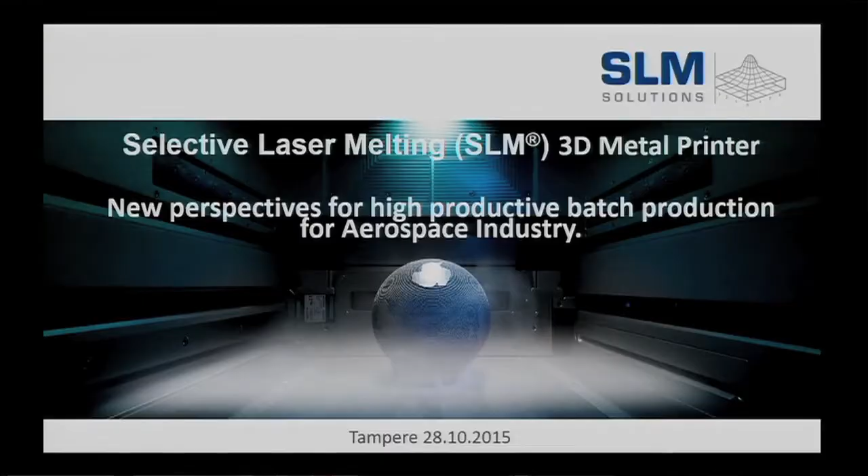So I will continue in English. Pekka, thank you very much for the introduction and for the opportunity to give a short presentation of SLM Solutions today. Actually, it's a pleasure. I think I was already here several times in Finland since I've been working for SLM Solutions, starting at the beginning of 2014. I started my business here for Northern Europe with SLM.

I would like to introduce the company, but I'd like to focus more on a case study for the aerospace or aircraft industry. So today we talk about a new perspective for high productive batch production. That means we are already one step ahead of prototyping, and we are really at the inflection point of serial production.

You already gave some information about me, so I'll just continue.

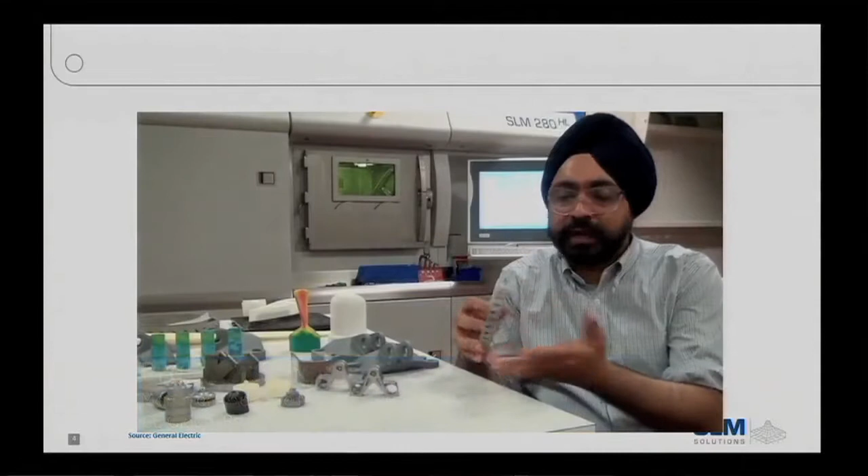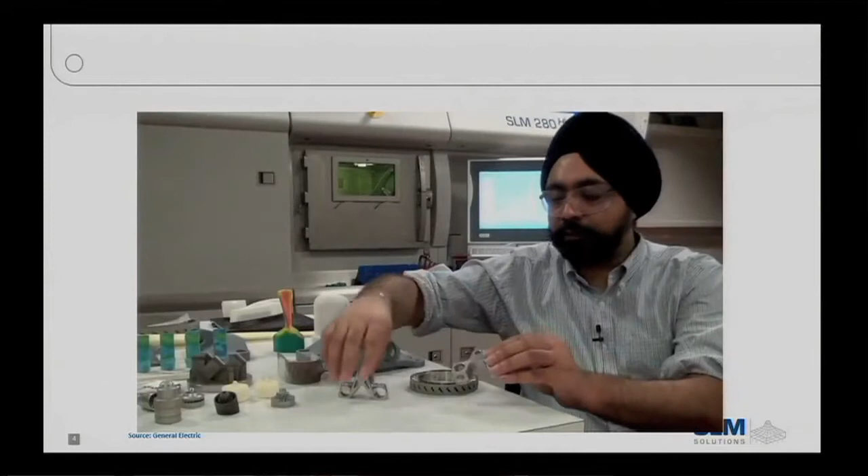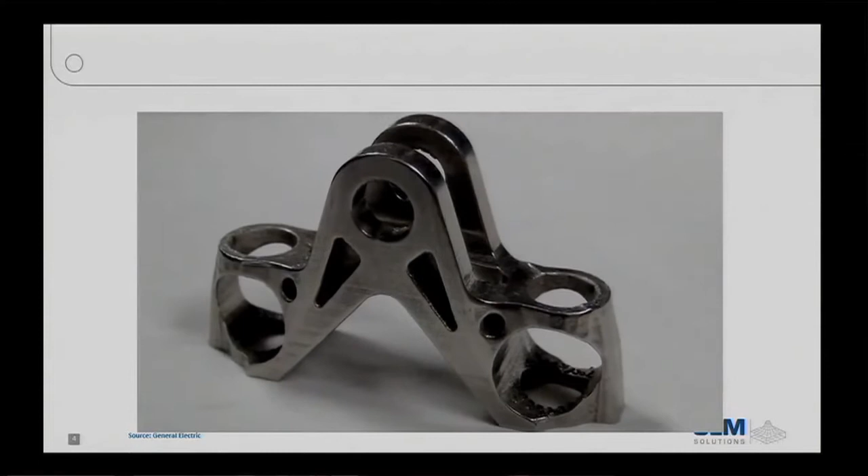The process of making a part, one layer at a time, instead of machining away material - it's a radically new way of making things. You can almost change the design on a whim. How does additive manufacturing change the way products are made? Take a look at the example of this bracket right here. This is how you make it conventionally, with very little geometric complexity. But with additive manufacturing, complexity comes for free. Therefore, I can make a part that is functionally equivalent but a lot lighter.

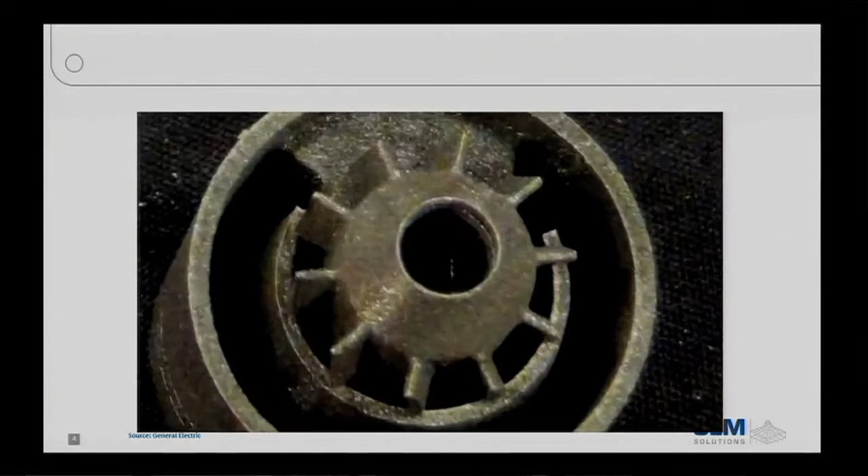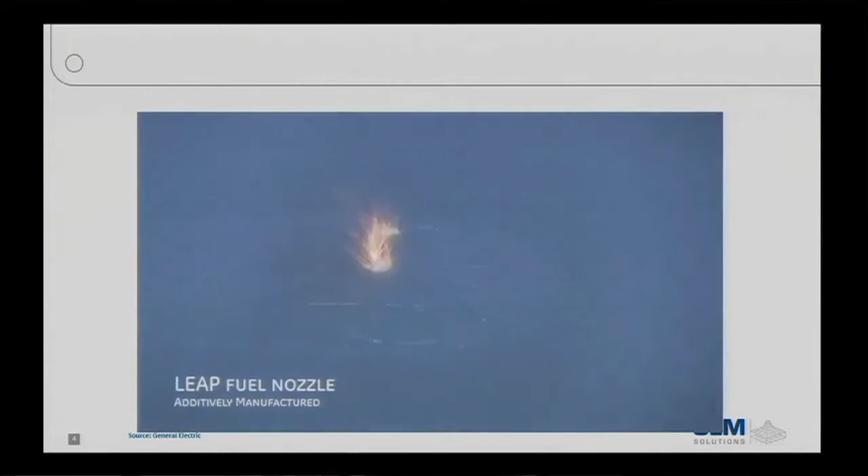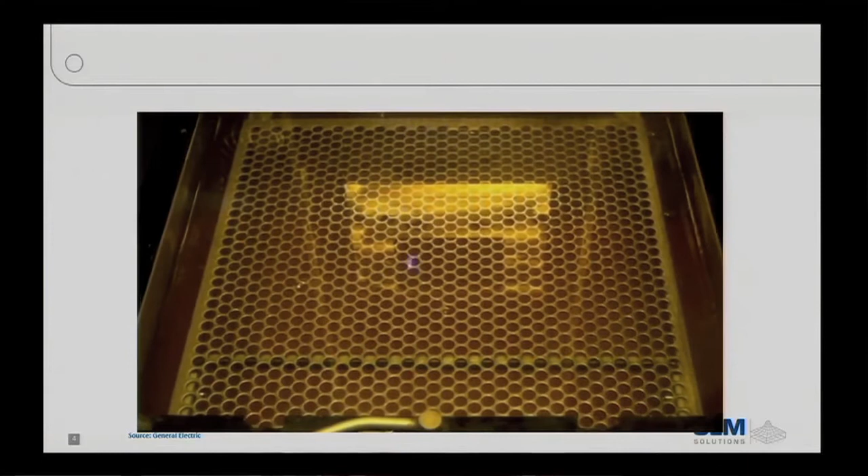Additive is just a great game changer for GE. We can iterate a lot faster, get designs through testing a lot faster, and make shapes and designs that were just not possible before. Over the last 10 years, GE has made tremendous strides in additive manufacturing, and we are now taking it into production - we'll be in production in the next year and a half to two years, in anticipation of the launch of the CFM LEAP engine. The technology is here, we've shown that it's viable, we've taken it out of the lab, it's almost ready for industrial use. We just need the infrastructure to come together so we can take it to the next step. This truly is the future of manufacturing, we believe. It's going to find a really unique niche in manufacturing technologies. It's not going to displace conventional manufacturing, but it's really going to be a game changer when it comes to making complex shapes with high performance, which is so critical to GE.

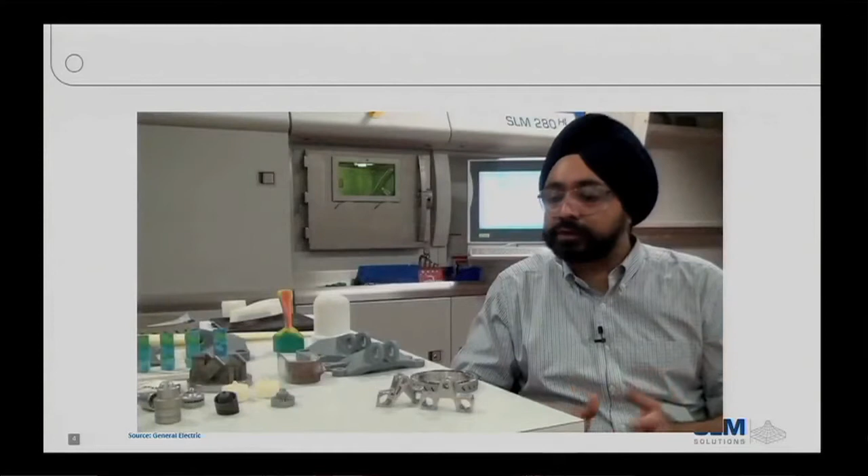Okay, this was the lucky punch, hopefully to wake you up this morning, because I recognize that you have very nice, comfortable chairs here in the university. This is not usually in Germany. Usually you have wooden chairs because people are afraid the students can fall asleep.

So hopefully now you are fully awake for listening to my explanations. I just want to give you a brief introduction, and I would like to start with a short agenda, so what you can expect this morning from me.

On the one hand, of course, a short introduction of SLM Solutions Group. Then I will show you a little bit about the initial situation of part production. And then I will show you the idea of high batch repair by means of SLM Solutions, and at least how we think to increase manufacturing productivity. This is not only a vision, it's already available.

SLM Solutions is manufacturer for selective laser melting systems, and we are located in Germany, very far in the north, very close to the East Sea. The city we are located in is Lübeck. So usually we work where other people spend their vacations.

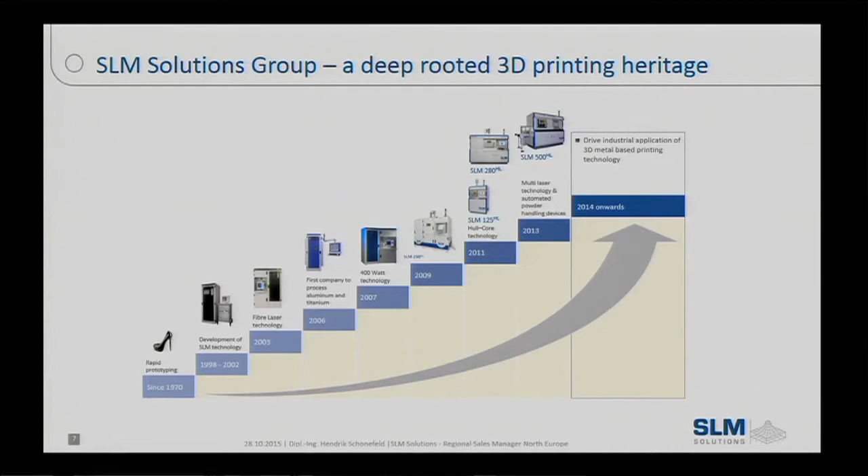We have a long-term history in rapid prototyping. I don't want to bore you with a long history of different joint ventures, and sometimes we changed our company name. But we started already with rapid prototyping, that means vacuum casting, metal casting, in the 70s. And at the early stages of this technology, when it was invented, we already started in the late 90s, early 2000s, with developing and selling selective laser melting systems.

At that stage, more or less, to universities. The technology was really not mature for the industry. You had very porous parts. But over the years, we developed and made very good improvement, so that our goal for the future was to have one day machines which have an industrial standard for industrial serial production.

And we reached that goal in 2013 with our SLM 500, working with 4 times 400 watt multiple laser systems to increase productivity and increase the build speed 4 times in comparison to the, at this stage, in the market available machine systems.

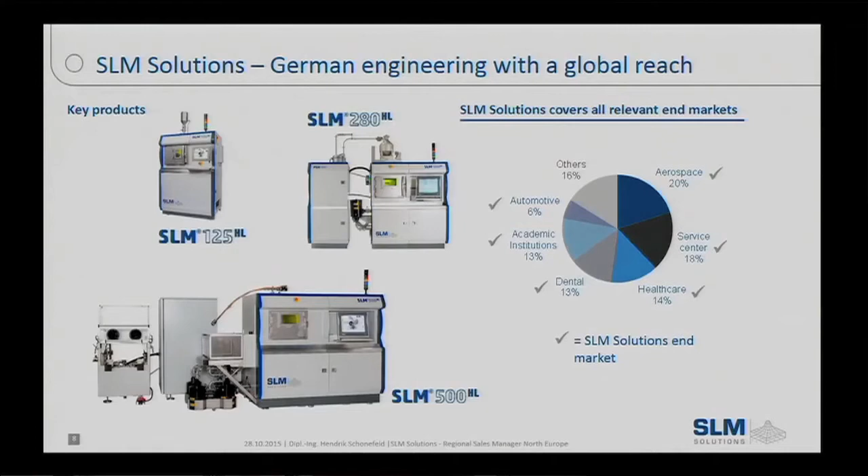In summary, we have 3 machine sizes available: the SLM 125 with the smallest build envelope, and then the SLM 280, the middle-sized version, which is more or less the most wanted system in the industry at the moment, because it's a very good system to start with the technology. It has already a size of 280 by 280 millimeter in the flat surface and 350 in the Z-axis, so you can already produce a lot of industrial applications with this machine, but it's also flexible in changing materials in a short time.

And then, of course, our flagship, the SLM 500, which is really dedicated to serial production in one material. We cover a lot of relevant markets already, and you see some facts and figures over here. Aerospace is, of course, one of the most important applications for us, and we have a huge customer base already in this area.

For example, GE, the guy from the video you have seen before, Prabhjot Singh - GE is, I think, one of the early starters with this technology, and they made a really good approach in the past, and they're operating our systems already also in the production area.

So then we have a lot of service centers already producing several parts for several industries. If you take together healthcare and dental, then to the medical area, you can say medical industry is also a huge part of that. Academic institutions, so that means universities, research centers - I think more than 70 or 80 of them all over the world having our systems already. And automotive is an increasing industry for this technology.

We are not talking about serial production in that application, but of course about a lot of race cars and customized cars. So this is a growing area, and there are a lot of other industries already looking into this technology, and I believe a lot of industries at the moment are not aware of what is possible with this technology. But I'm really glad about the presentations we had this morning, it gave you a really good overview, and that's the reason I don't have to give you 1.5 hours lecture about the theoretical things. It was really good, and I loved it because it gave you a really good overview.

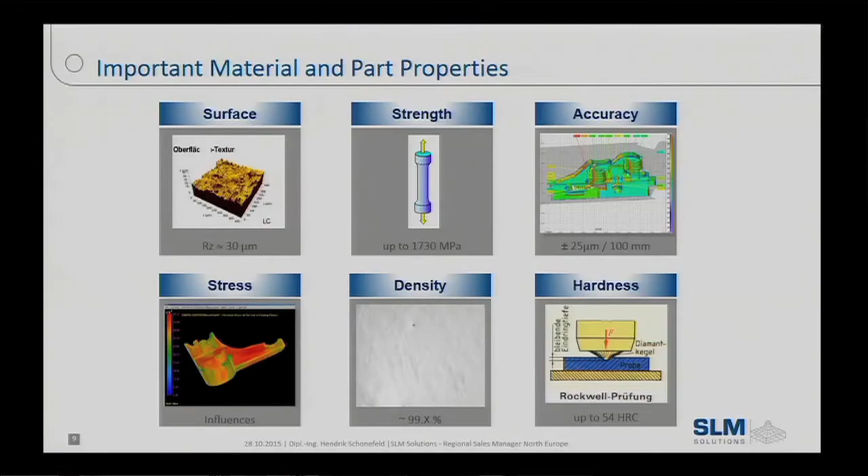Some of my previous presenters already gave you some information about that, but for this project we had dedicated requirements for the parts which are conventionally manufactured. So there was the question of what kind of surface roughness is needed, what kind of strength is needed, what kind of accuracy they require, and also the hardness and the density. Density in that case was 99.x - usually we can achieve densities of 99.7% or even higher, depending a bit on the material. But in that case it was not important to be 99.7, it could be even less, but it must be more than 99.0%.

And of course the question was, what about the influences of this layer-by-layer welding process? That means we cause stresses in a part by layer welding, since this is a laser welding process.

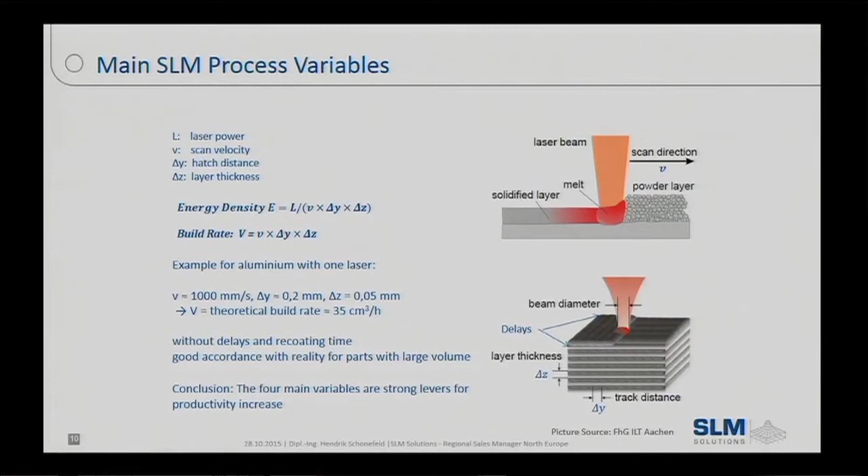We also had to discuss the physical system. Now you are asking, okay, this is a sales guy, he should have no idea about physical systems. You are right, but anyway I would like to try it. Just to be aware, very often when you think about laser cutting, you know as more laser power you can use, as bigger plates you can cut. Or when you talk about cars, as more horsepower a car has, as faster it drives. That's fine, but it's completely different for additive manufacturing because we just talk about energy density.

When you process a material, you need a dedicated energy density for that material. The equation for energy density is shown on that slide: it's laser power divided by build rate. And build rate is a product of scan velocity, layer thickness, and hatch distance. So that means if you increase the laser power and want to keep the energy density constant, you also have to change these other three parameters.

To increase scan speed is not an issue, it's easy. If you increase layer thickness, you reduce your surface resolution - that means the surface roughness gets worse. And if you change the hatch distance, which is usually the distance between the different weld tracks you see here, this is usually not possible because your spot size of 82 microns is a stable value.

So if you want to increase that, you have only one chance: you can only defocus the beam. This is important when you increase the laser power - you have to defocus the beam up to 500 or 700 micrometers. But that would mean, at the end, the accuracy of the process is also worse again.

It's interesting - when you produce bulky parts with very solid areas, it might be good to increase productivity by defocusing the beam. But as we've seen this morning, the benefit of additive manufacturing is to do topology optimization, to get lattice structures with thin wall thicknesses. So what will help you with a defocused beam? Nothing. You need this small beam size, and that's the reason you can only produce with 400 watt or less for the different materials.

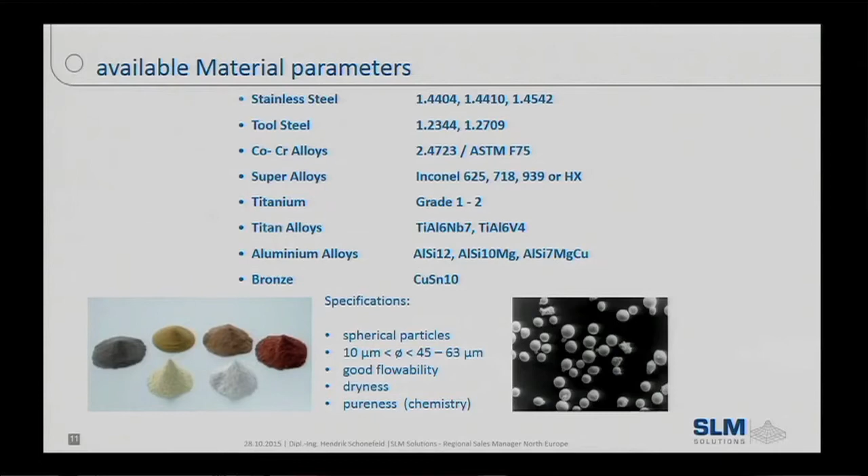So it was the question, what kind of material? And of course the specification of a material is very important - we had that information already this morning. So spherical particles, shown like here, the powder distribution size, good flowability, dryness, and of course the chemical purity. These are, let's say, the rough requirements for each customer project we're usually talking about when it comes to case studies or business cases.

Coming now to this dedicated case study, we are talking about a project with different work packages, and this is shown here on that slide.

So we are talking about a work package dealing with fixation and clamping devices. We're talking about a repair project, so refurbishment of turbine parts. And of course, we're talking today about quality assurance, and in this case about skin and core strategy.

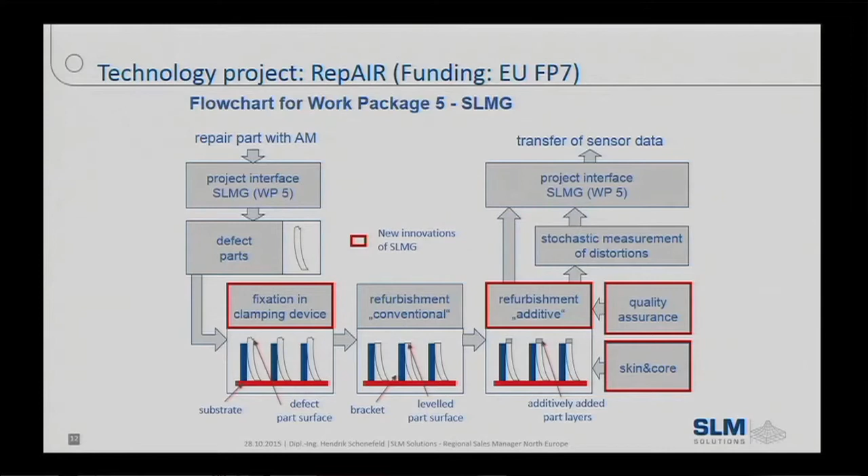This is a rough overview of the project. The most important thing is that we are trying to repair parts from a turbine, so-called shrouds. They are located in a turbine, and after some working hours, they usually have an area of wear. Today you just dismount these parts, throw them away, and put new ones inside. It's very expensive because the parts are very expensive, so the idea is to remove this worn area and produce it again with additive manufacturing, refurbishing the parts.

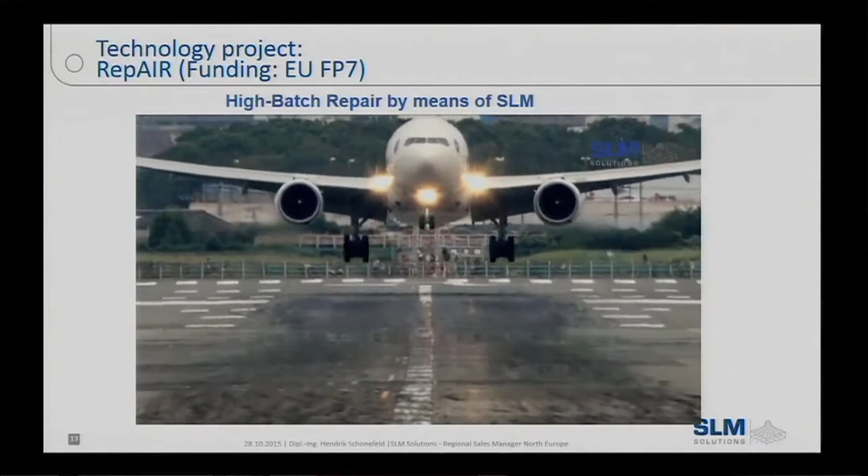So this is the rough case study, and to make it easier to understand, I would like to show you a movie of this still-running project. I hope it's loud enough, but it's just music, so I will give some explanations.

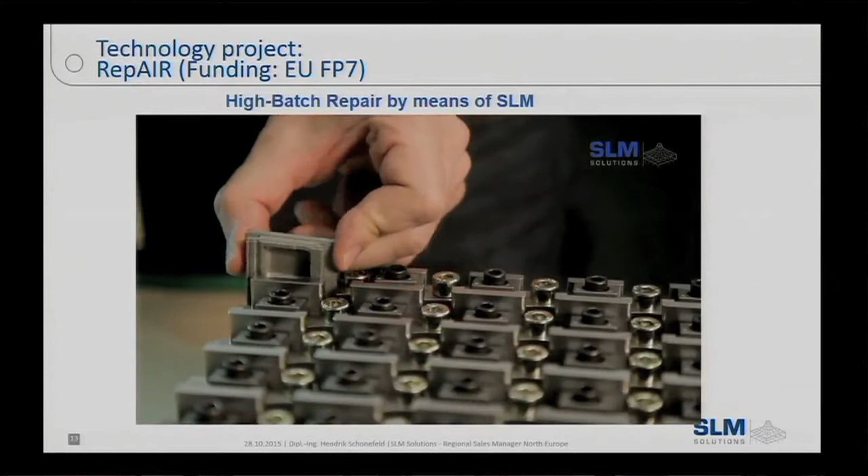So we are talking about future repair and high batch production. What you see here are these shrouds, and this is the area of wear, which you can also see when it's focused again.

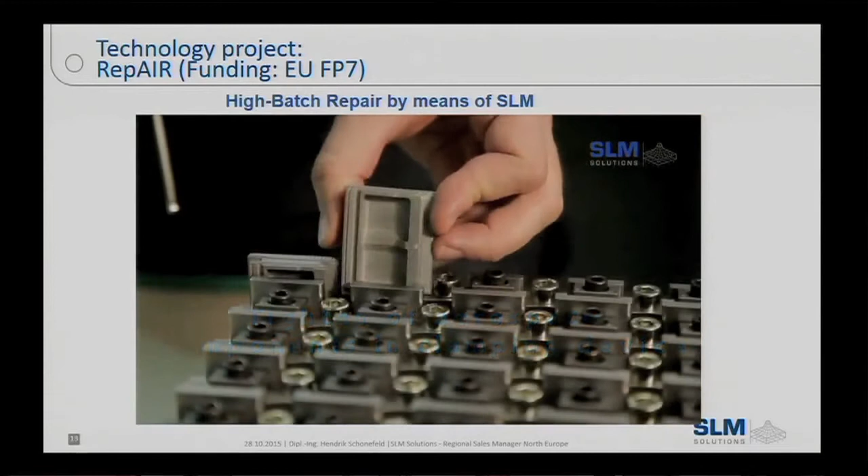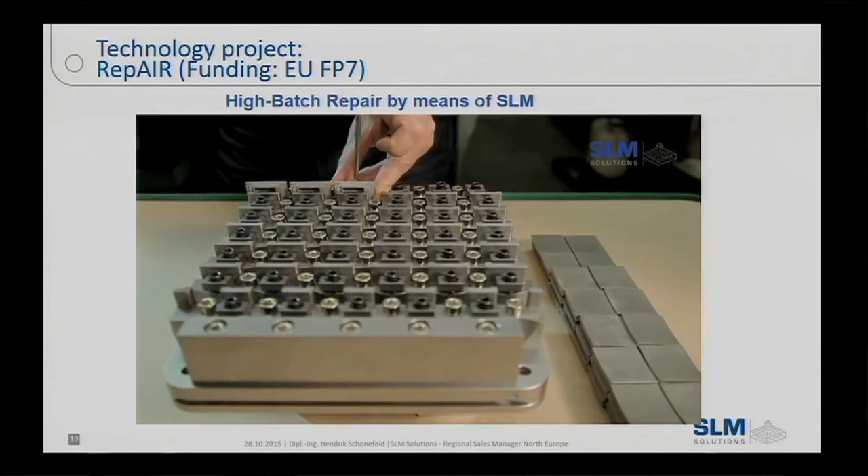What we invented in the first step together with our customer was this clamping device, because we need all shrouds at the same level. When we mount all 42 shrouds into this clamping device, we mill them flat, down by 3 millimeters, so that all parts are at the same level.

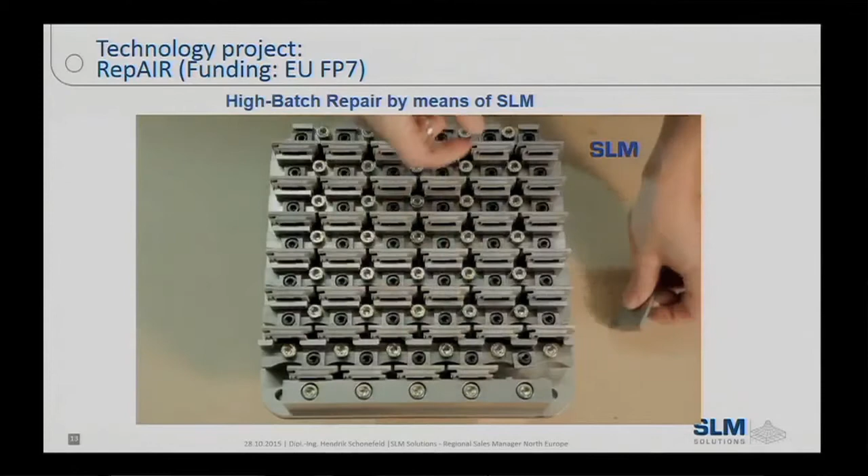Today this is still a running project, and this is still made manually. The idea for the future is to automate that, to reduce the manual work.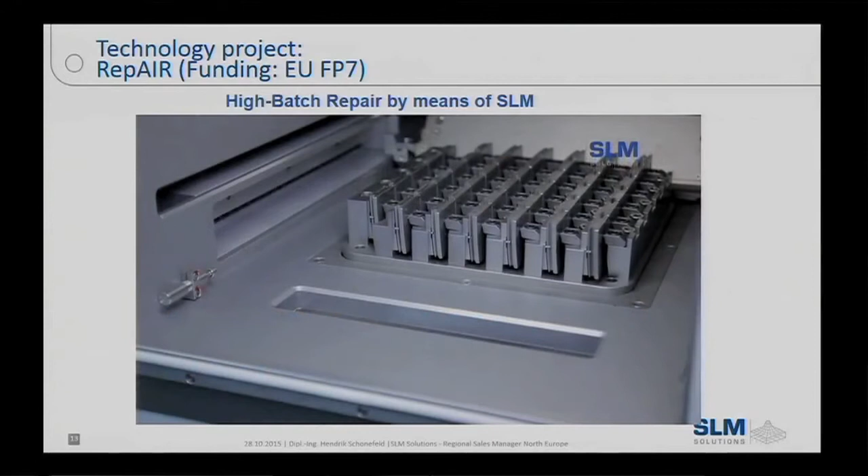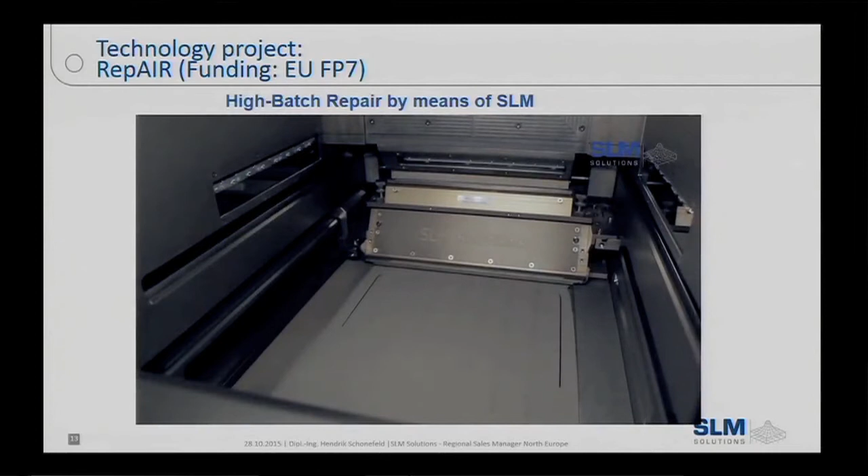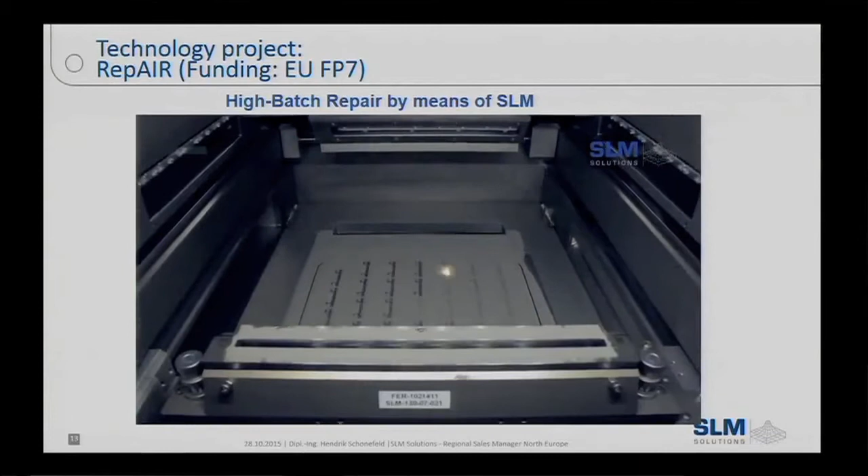You drive down the table in negative Z direction so that you get the first flat layer. Then we recoat the powder with this powder hopper. In the next step, in this case it's an SLM 280 machine with twin laser, two times 400 watt laser sources, and we produce the material again on these parts.

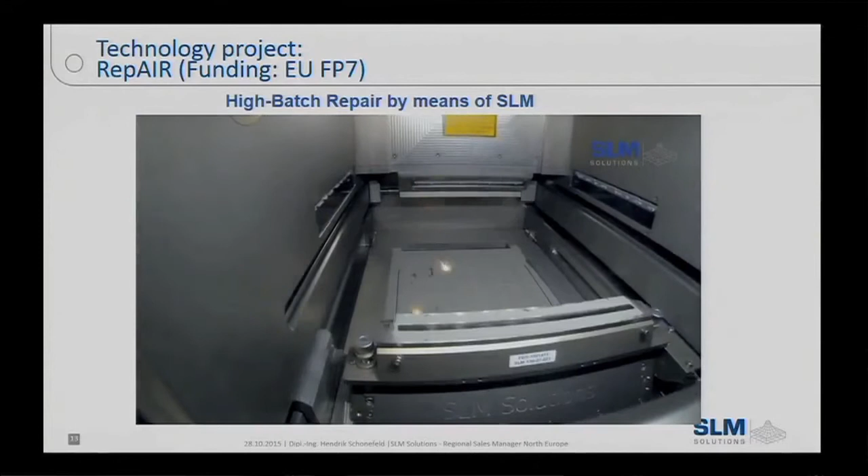Unfortunately this is not real time, not this year, possibly next year. We are always working on higher build rates, but I think we are already up to the notch with these multiple laser systems.

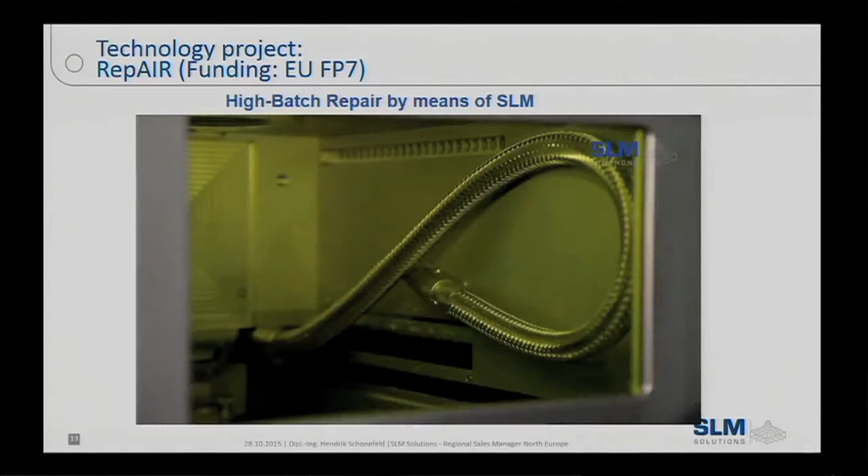And you see here how this process works. After that, you can suck the powder directly out of the build chamber. It is sieved and directly provided for the next build job.

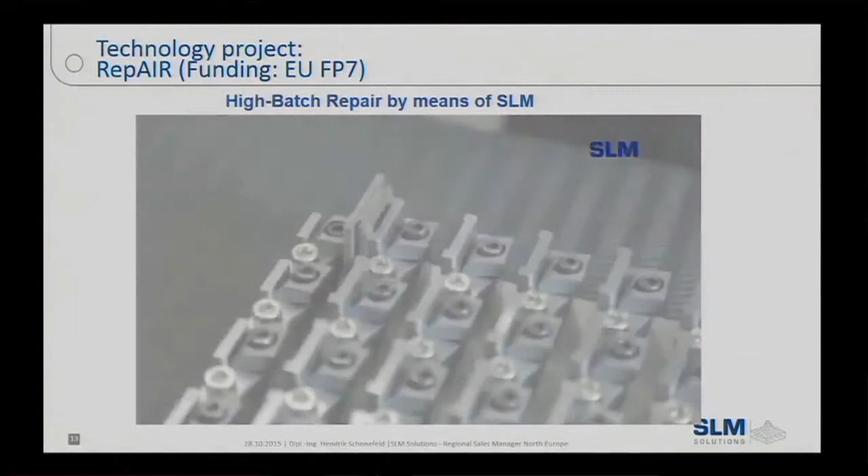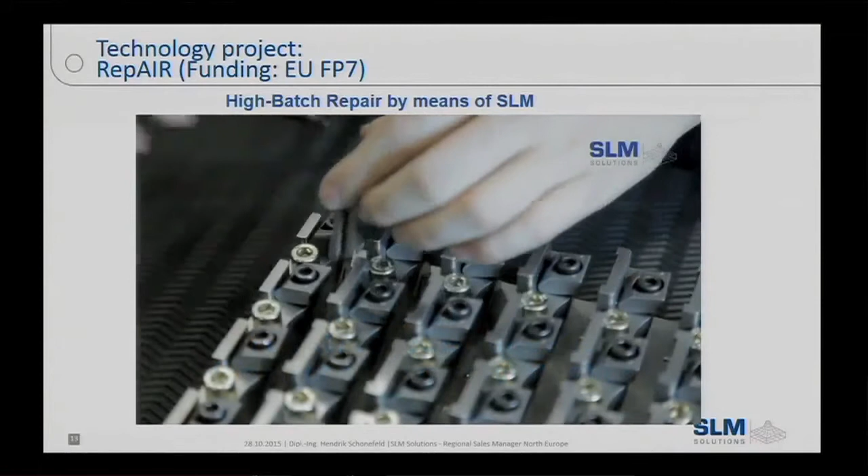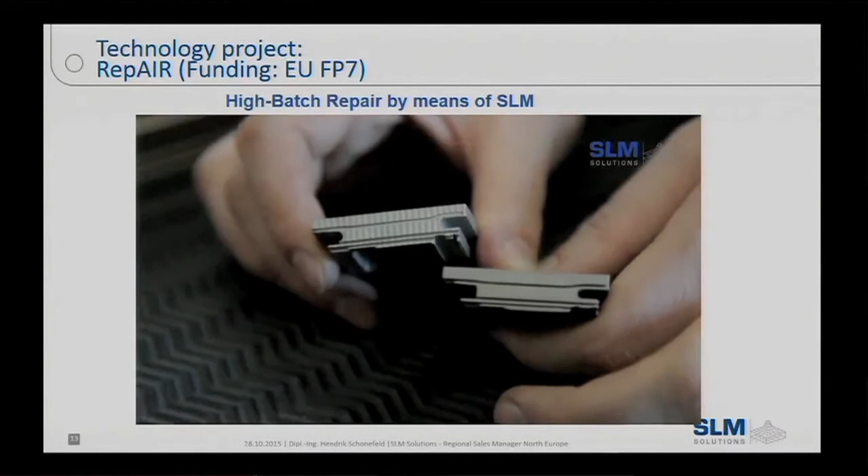After sucking all the powder out of the build chamber, you take off the plate with the finished parts, dismount them again, and blast them usually, and then you can see the difference between the old and the newly produced and repaired surface. This business case is really green at the moment, because it's cheaper to repair it instead of changing it and paying the price.

In this case we use a 1 kilowatt laser source, but only to produce the core of a part. That means we always expose the outer surface and the thin structures of a part still with a 400 watt laser source, because, as I explained before, we need that small spot size to keep the resolution.

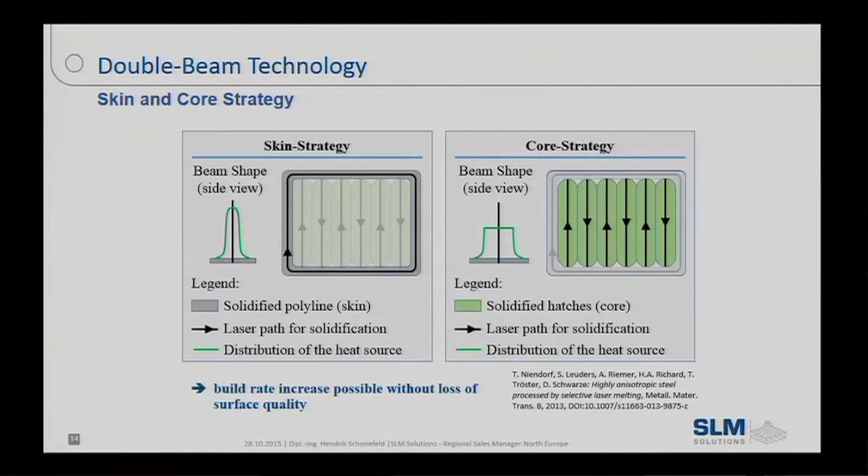But the internal core of a part we process with 1 kilowatt with a top hat profile, so the energy density and intensity in the beam spot is always the same compared to a Gaussian profile. And we only expose the core after every second or third layer.

So if you remember some slides before when I explained the physical model, we increased the layer thickness virtually because we only exposed the core after the second or third layer. This is one thing. We use higher laser power, and we defocus the beam for the bulky areas.

Usually for these parts, because they are quite small, it's possibly not that interesting. That was the reason we processed the parts with twin laser, 2 times 400 watts.

We made some tests, because the big advantage of this skin core strategy is that we can achieve quasi-single crystalline microstructure in the core. That's very important for turbine parts when it comes to centrifugal forces. This is something we are still working on. It's still a scientific thing in development, and it's not possible in all materials, only in stainless steel, Inconel, Hastelloy X, and cobalt chromium. But you see that this looks really different in comparison to the outer surface of the part, which usually has a quite chaotic microstructure.

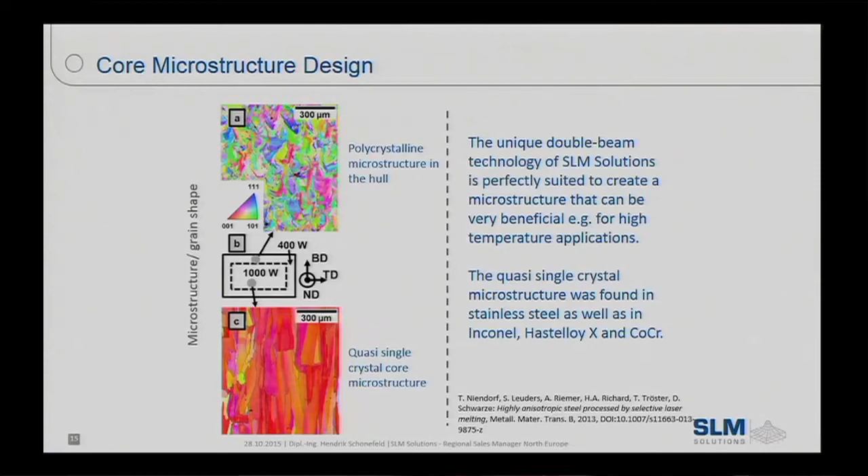So this was one of the aspects of this case study which we got out of it. We already made some trials with this laser configuration before that case study, but here we could really use it. So we made also these tests with the hull core and hull skin core strategy. And we found out, what was very important, that we get good reproducibility. It was possible over the different test cubes and different layer thicknesses we produced to achieve almost always the same kind of density. And what was important, as I said before, it must be more than 99.0. This was possible.

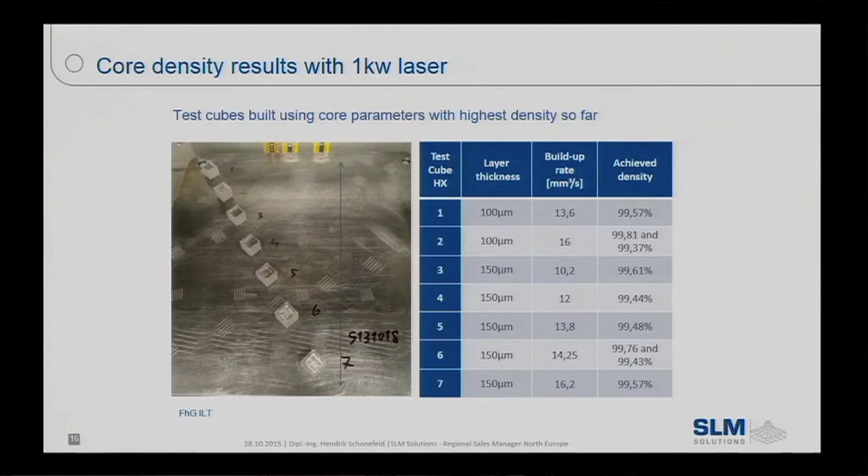As I said, it's still a running project. That means this is just one part of the result. The things are going on at the moment. We are talking about automation. We are talking about quality control. We have already some quality control systems in our machine, but for this project we have some other things and other ideas for the future. So there are still things going on, and this is a running project, but I think it gives you already a quite good impression about what is also possible with this technology and this hybrid manufacturing, how we call it, when we repair something or build something on an existing prefabricated part or something like that. This is also one opportunity and one application of this technology.

Okay, how can we now transport this to a high batch production, which will be the result of this case study? So one day this should end up in a serial production. And this is possible, I want to show you with the next movie, because this is the movie about our SLM 500, how it works producing with 4 lasers simultaneously. So enjoy, please.

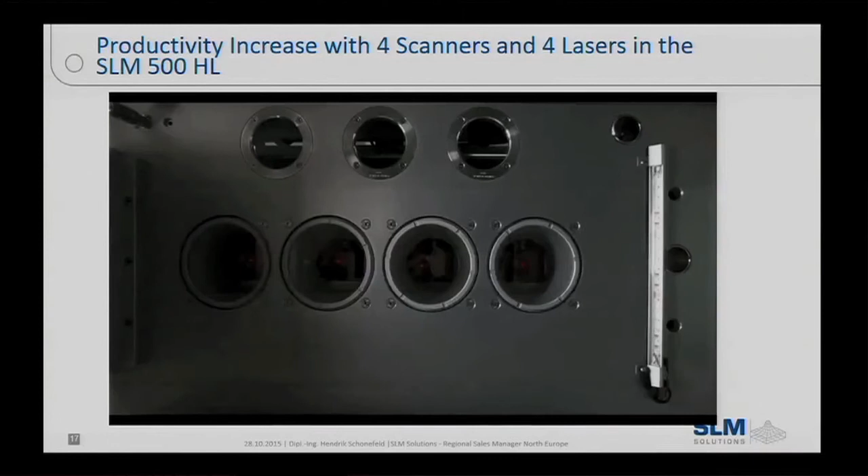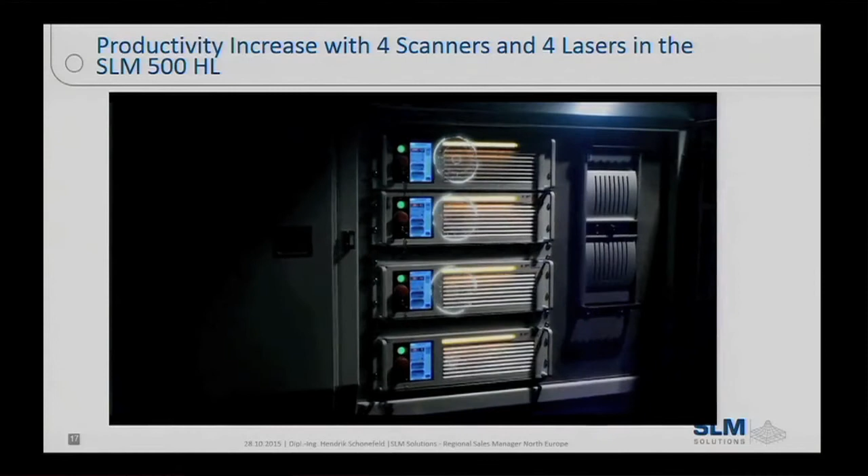Three minutes? That's enough.

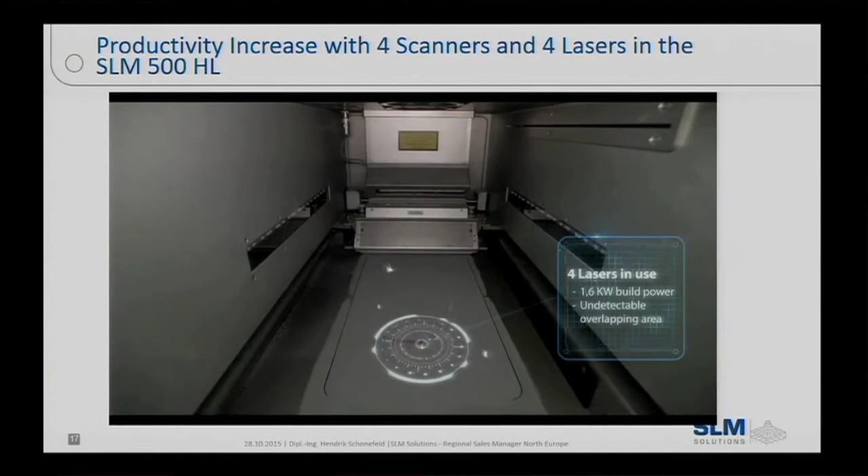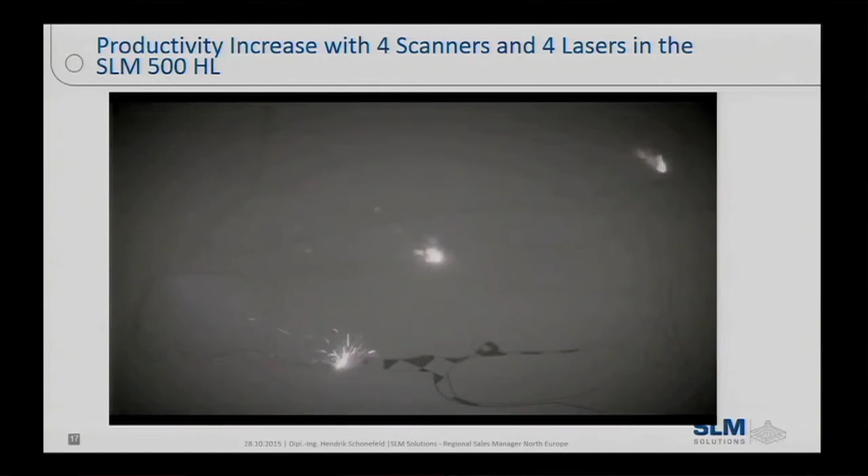We are producing here 2 gear housings for a race car in aluminum. 2 huge gear houses in a time of around about 70 to 80 hours.

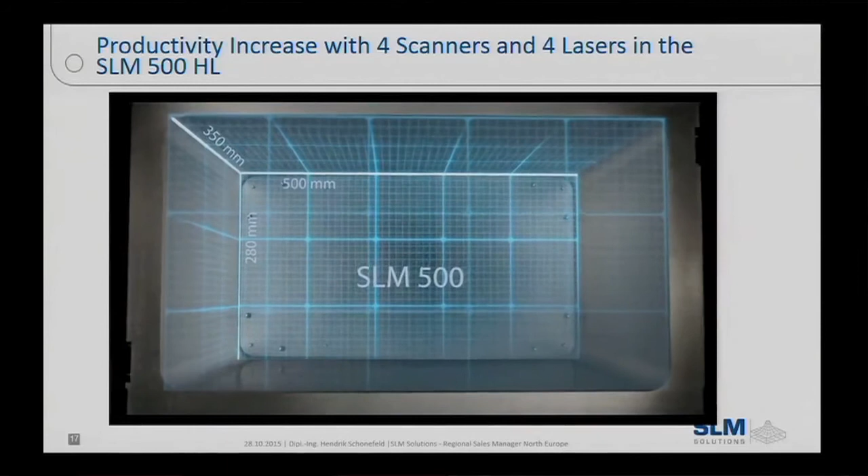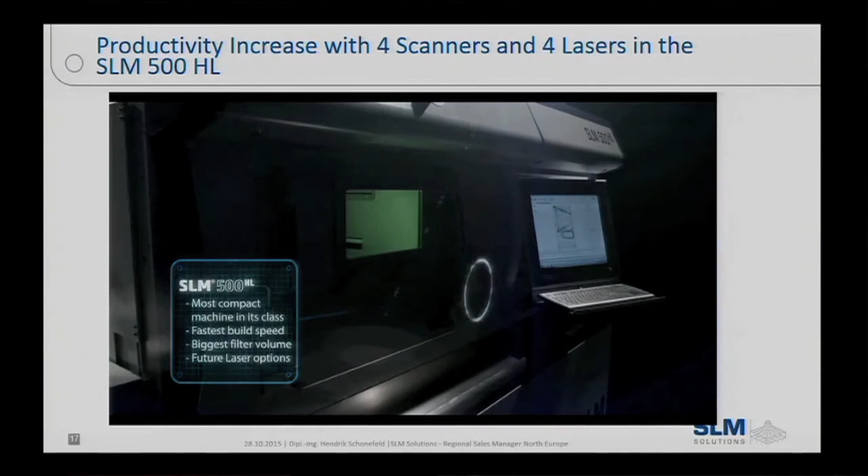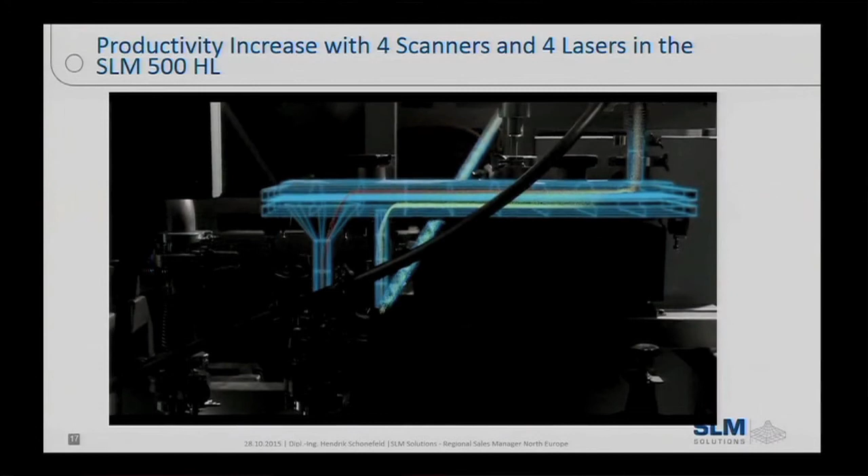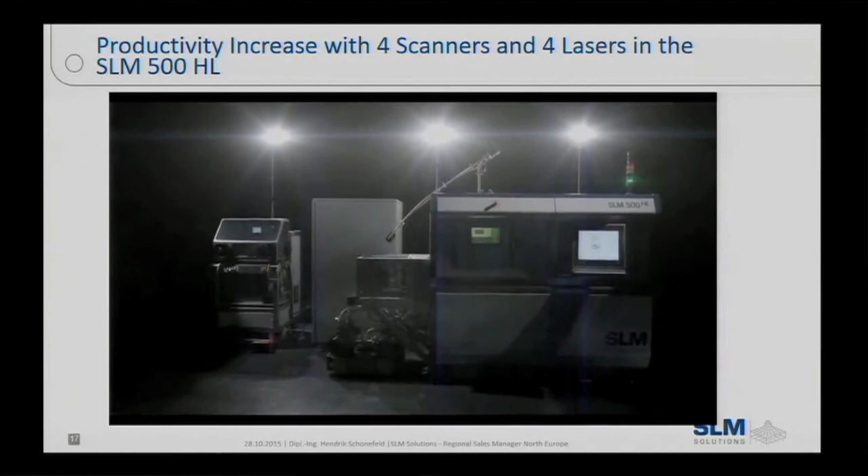This is the way the material is sieved after the process. The red material is the overgrain material, which goes to a different bottle, and the rest is transported back to the main tank for using it for the next process. So a complete closed loop powder cycle we have in this machine. That's the reason it's dedicated for serial production, because the powder is always in a closed loop powder cycle under process gas.

So usually the operator never has to touch the machine during the operation. And the machine has also a pallet system or changing system. It's not similar to a CNC machine, but it is a kind of pallet system where you can change the build cylinders after the process and put an empty build cylinder already inside, so that the downtime of the process is really reduced to 20 minutes, half an hour, whatever.

When we have a look at these gear housings we produce here, usually these are for a race car. It makes no sense to cast that because the tooling is quite expensive, and that's the reason we process this for the customer in additive manufacturing.

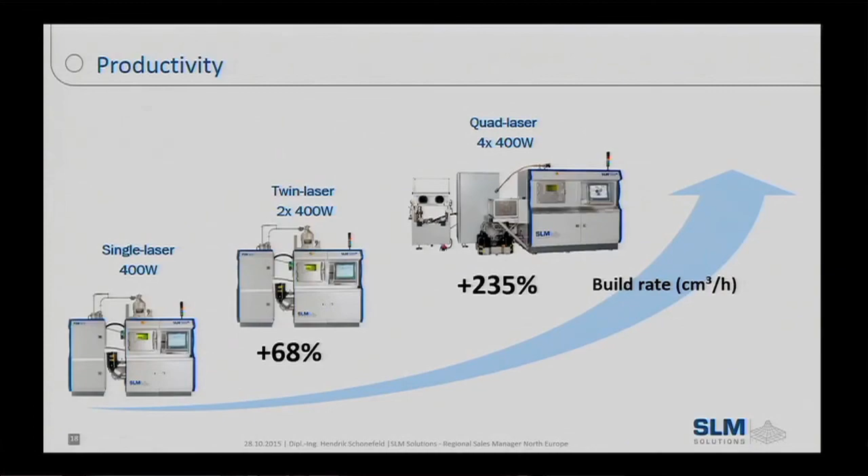Last but not least, when we look at the productivity of our machine systems, if you compare a single 400-watt laser system to a quad, 4 times 400-watt laser system in an SLM 500, we can increase the build rate in cubic centimeters per hour by 235% as an average. This is really the fastest build speed at the moment in the market. This is our idea of how we would like to push this technology for serial production. We already did it. We have several customers already using this technology. One of our customers has already 8 machines for serial production. And we think about more automation for the future, just as an outlook.